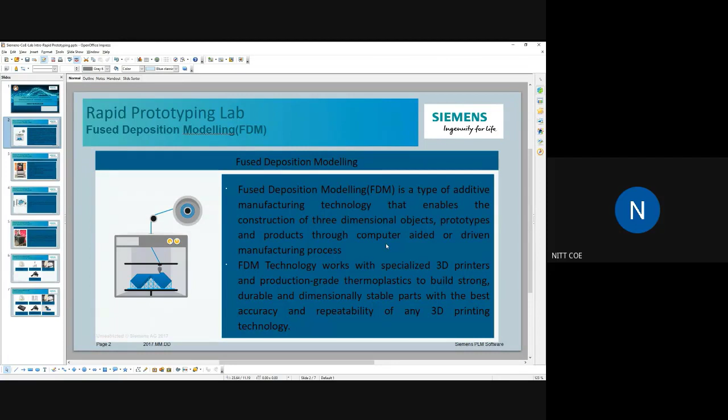And since it is actually fusing, that means melting and then hardening, the structural integrity is better than the other processes. This is the actual Stratasys F270 printer that we have here; in this image you can see the printer, and later we'll be showing a live demo of the same.

Some technical specifications: the build size is 305 by 254 by 305 mm, that means 12 by 10 by 12 inches. The minimum layer thickness is 0.127 mm, and the maximum layer thickness is 0.33 mm. In between there are two more layer thicknesses, 0.178 and 0.254. So only these four layer thicknesses are available for this particular printer.

If we go for the minimum layer thickness, the accuracy and the surface finish would be high. But if we go for a higher layer thickness, the time taken would be less, but the surface finish would not be so good, and accuracy may not be perfect. The tolerance for the printed part is plus minus 0.2 mm, which is very low as compared to other manufacturing processes.

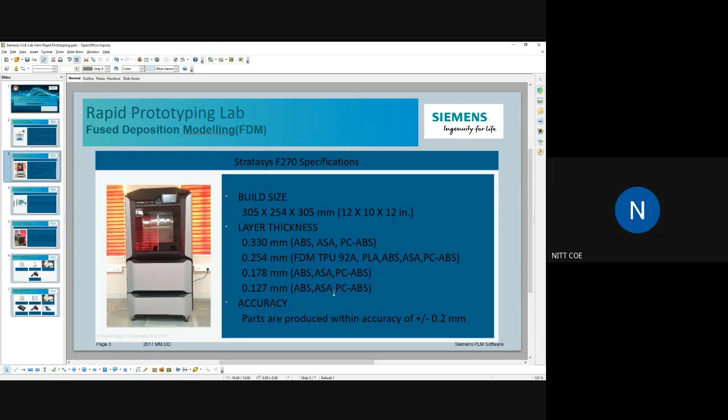We are going to use the GrabCAD Print software for integrating the 3D printer with our desktop. The advantage of using this software is you can directly feed a CAD file into it, and it would automatically convert it into an STL file. You don't need to tessellate it separately. It saves time, and you can just create the CAD model.

Once you're done with the CAD model, just feed it into the software. The software does the rest, and everything is automated. You don't need to orient it or arrange it. We will also see how to use the software to generate the parts, how to import, arrange, and scale them. Depending upon the scaling and the layer thickness, we can estimate beforehand how much time it would take.

Finally, once we are done with the printing, some support material would be there with the total printed part. So we have to remove the support material and take the build material only. That's our finished product. Sometimes we can manually remove it, but sometimes it is so intricate and so delicate that if we try to remove it manually, it may damage the actual workpiece.

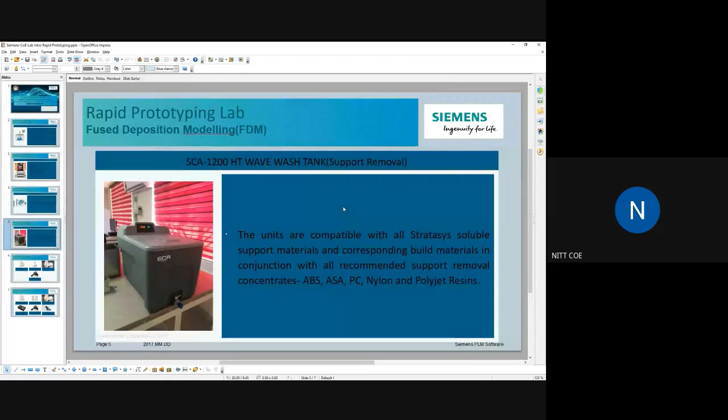So we have a wave wash tank here in our facility, and it has an alkaline solution inside it. We can dip the part inside and heat it for a particular time. The melting temperature of the support material is less than that of the build material, so when we heat it, the support material dissolves inside the solution, and the build material remains as it is. So it can remove the support material without damaging the build part. We will also see how to operate that.

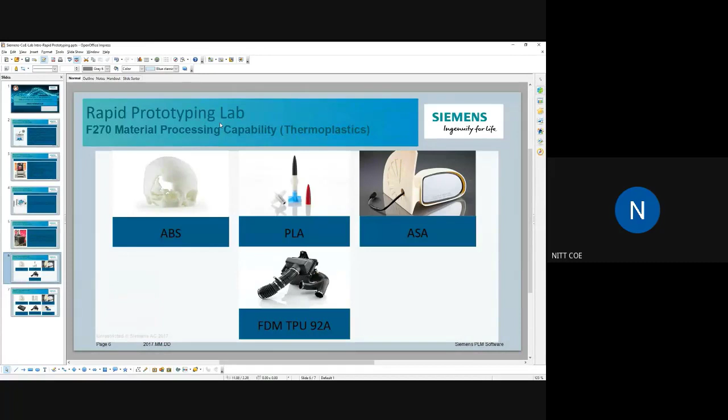And finally, we can see the different components that may be produced from this rapid prototyping. We can make biomedical parts; we can create this prototype of the skull. In injection molding, an example has been shown here. In automotive parts, parts which do not require much structural integrity may be easily produced on mass scale using this 3D printing.

And very small, intricate, fine detailing, for example in printed circuit boards, may be created using this technology. Flexible piping and various mechanical parts which only have to support the actual parts and don't require much structural integrity may also be made.

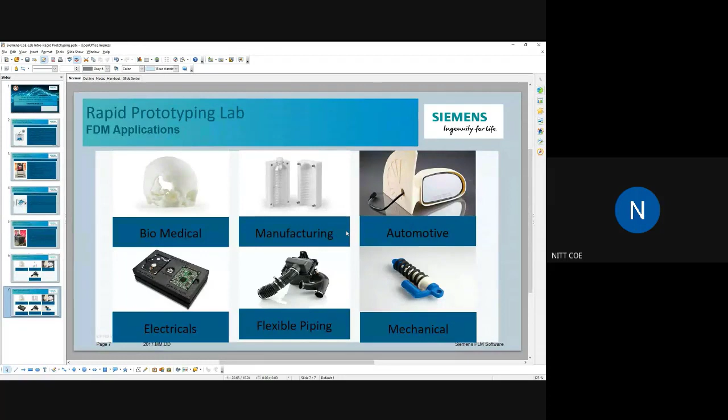Okay, so that's all for the background theory part. Now we can move on to the actual software that we have here. So this is how the GrabCAD software interface looks. As you can see, it is showing a build plate diagram, and upon it, it can show us where the final build piece should be placed.

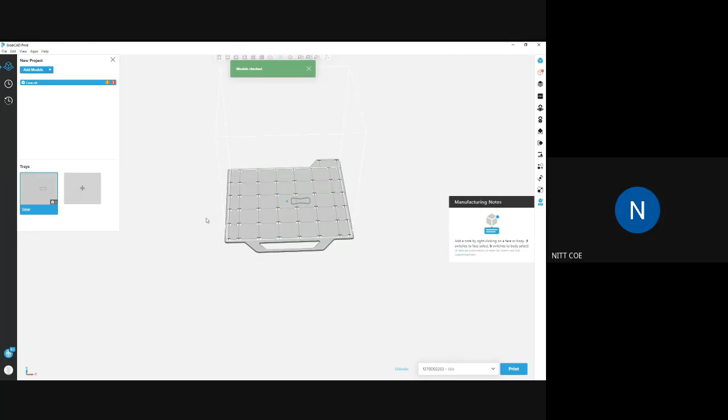Once we have opened this GrabCAD software, we can go for add models, and from our device we can upload any model. For example, I'm going to import this gear CAD model that I already have. It is saying that it has been imported. As we can see, it has imported the model, but it is very small, so it won't be of much use. So I can scale it up. But before that, you can see that it is showing some errors. The model has some errors, and it is very small.

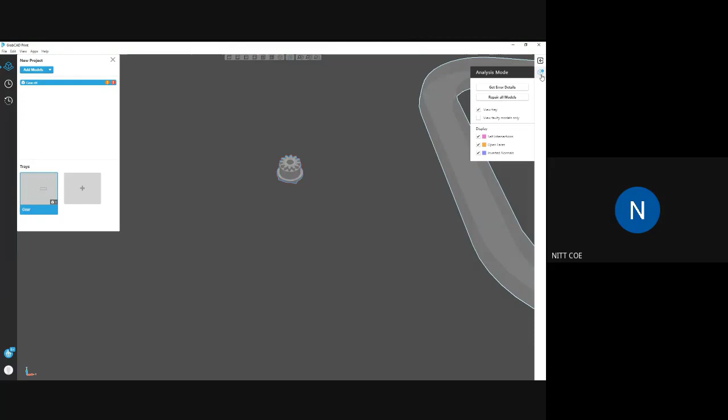It may be because of compatibility with the software in which it has been made. We don't need to worry about that; the software will automatically fix those errors. You can click here. In the analysis mode, it is showing repair all models. So we can click on repair all models, and it would successfully repair it. Now it is showing only one thing, that it is very small.

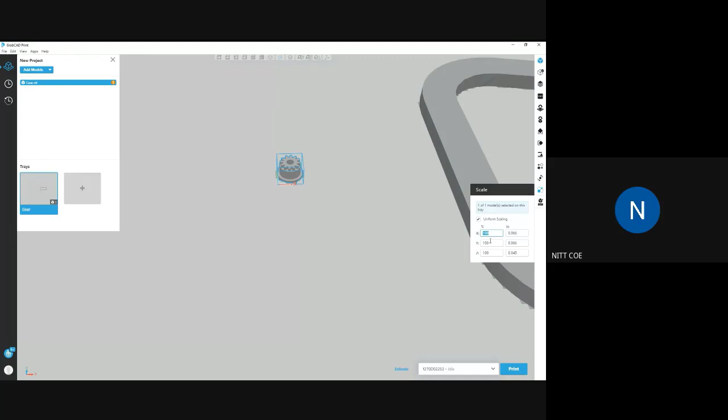So here we can see scale. We can go for scaling, and right now it is showing the full size, 100%. I have checked the uniform scaling. That means if I change x to 200%, y and z would also be changed by 200%, since it is uniform scaling. But still it is showing the model is very small. So we can try 500%. Now the error has gone, and I think this print may be formed.

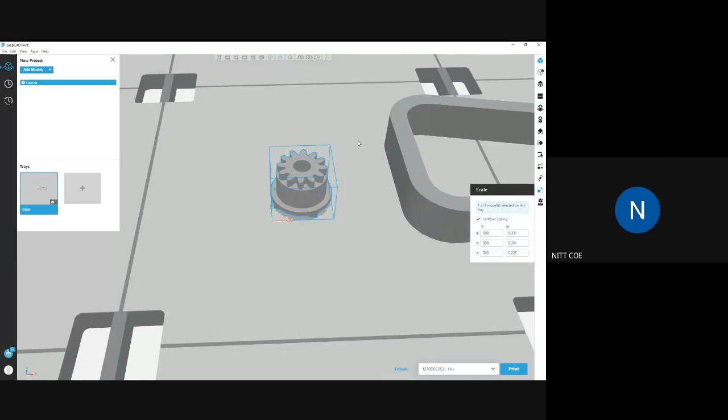Now other things are also there. For example, if I go here, it is showing the model units are in mm. We want mm only, so we will leave it as it is. Now here it is showing the tray setting. For the model material, right now in our facility we are using ABS material only, so we will leave it as it is.

Now it is asking for the slice height. The slice height means the layer thickness. As I have shown earlier, we have four different layer thicknesses: 0.005 inches, 0.007 inches, 0.01 inch, and 0.013 inch. So this is the minimum and this is the maximum.

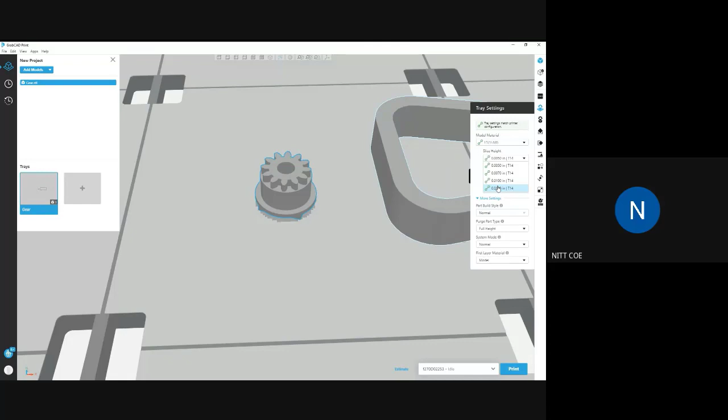If I take the minimum, the surface finish would be very good, but it would take much time. So in order to save time, and for demonstration purposes only, I will take the maximum layer thickness. The surface finish would not be so good, but it would take less time. The rest is default; we can leave it as it is. And now the model settings.

Now it is showing how the body should be. So now when it is infilling the layer, how should it fill? Here it is showing sparse. That means it is best suited for further reducing the density, when structural integrity is not a prime concern. So for demonstration purposes only, this setting is very good. So we can select this.

The second one is sparse double dense. It is a little bit more dense, but structural integrity is still low. The hexagram setting is the best balance between material use and structural integrity. The fourth one is sparse high density. It is used for high structural integrity when solid infill may cause build issues.

That means it needs to be somewhat porous, but at the same time, the structural integrity should not be compromised. And the final one is solid. It would leave no porousness, just fully fill all the parts, all the holes. So for the time being, we are going to use the sparse infill style. And the rest are default settings. We can leave them as they are because they are already optimized.

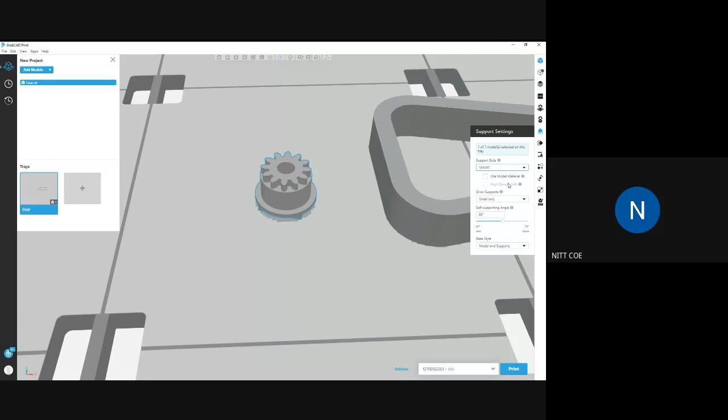Now the support material setting. Here it is saying that support style is smart. In the smart setting, it automatically chooses which type of support material is best suited for the given component. We can also choose manually, but since it can automatically detect, we will select the smart support style. And everything else again is default for smart style.

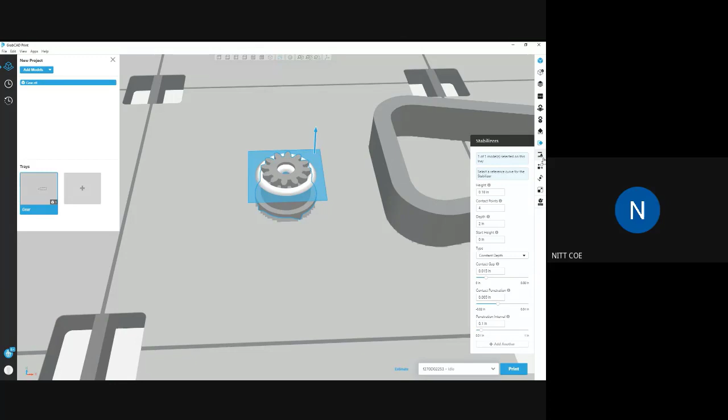And this one is stabilizer. When we are building a very big component with overhanging structures, then we need stabilizers. But right now we don't need any stabilizer because it is a very small component compared to other big components that we may build. And anchors are needed when we need to hold it tightly to the base plate. When we are building a very heavy component, we would need some anchors, but right now an anchor is not needed. So again we move forward.

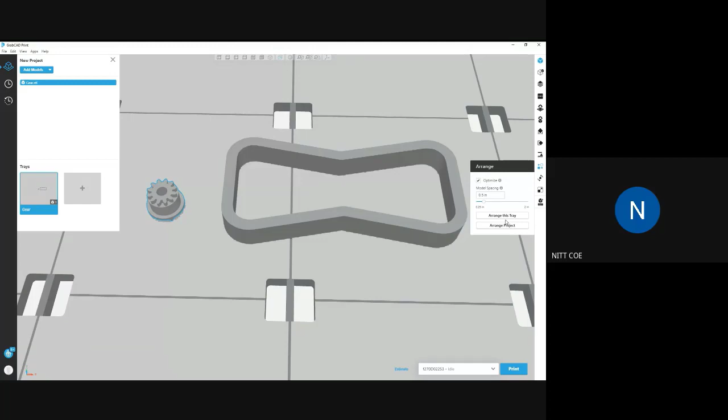Now it is showing arrange. If we are building more than one component, then we would need the arrange option, to optimize and arrange the tray. If I click on arrange this tray, it would automatically set them in the best possible location in the tray so that the nozzle has to move the minimum distance, and also the two components are safely spaced apart so that they don't get mixed during printing. It automatically detects the best possible configuration and arranges accordingly. We don't have to do anything. And the last one we have already done, scaling.

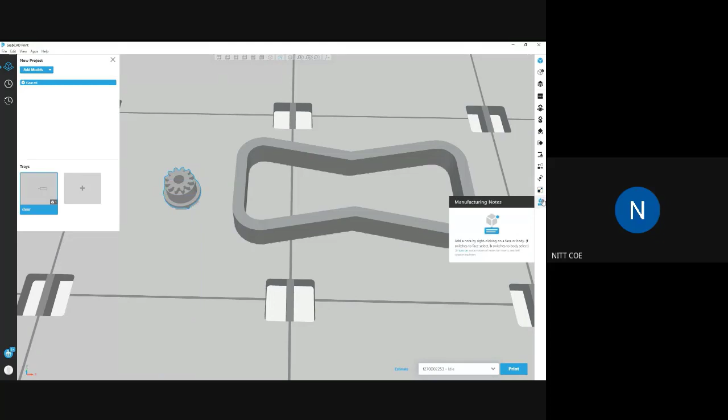Okay. So once we are done with this, we go to the printer selection. We type here the IP address of the printer and then select it. Since we are already connected, it is showing status is F270. We'll select it, close it, and here it is showing the estimate button. We click on estimate and see how much time it would take. Around 6 minutes. So we can give the print command and see how it is printing.

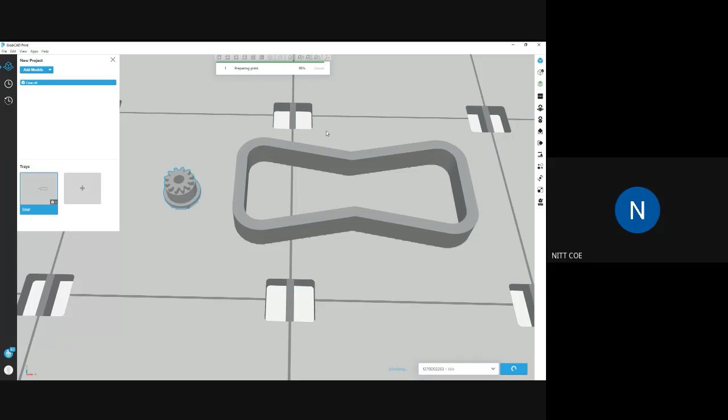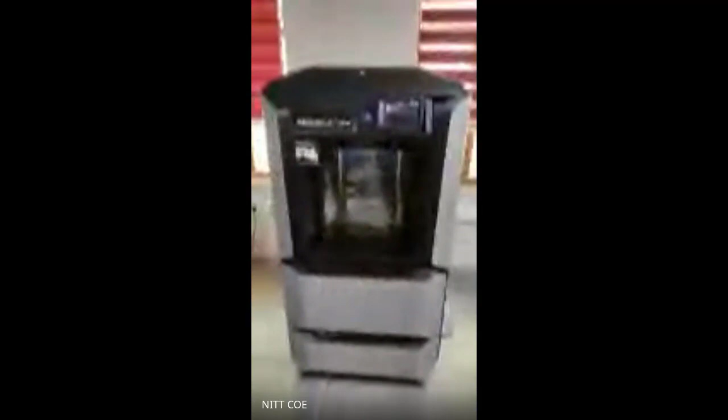Okay. So here is the complete printer, as I've shown earlier. Here we can see that in the queue it has given this gear component; it is showing in the print queue. It is showing the position in the build tray, and we can give the print command. Now we will see how it is actually printing.

So here it is showing the actual time for printing. It is showing estimated time 8 minutes. Now it has started. Now it is raising the plate to the top. As soon as the first layer is done, it would move one layer, then again

go on. As we studied in the fused deposition modeling, the plate would keep moving downwards until the required height is reached. Okay. So once it is done heating and printing, it would be completed. So total time it is showing 19 minutes.

So in the meantime, we can see the wave wash tank that we were talking about earlier. So this is the wave wash tank that is used for the post processing of the printed parts. So inside here we can see it is the alcohol solution, and in this we can keep the printed component.

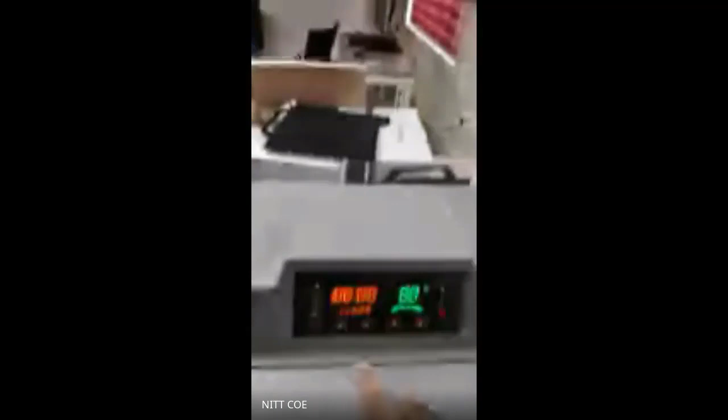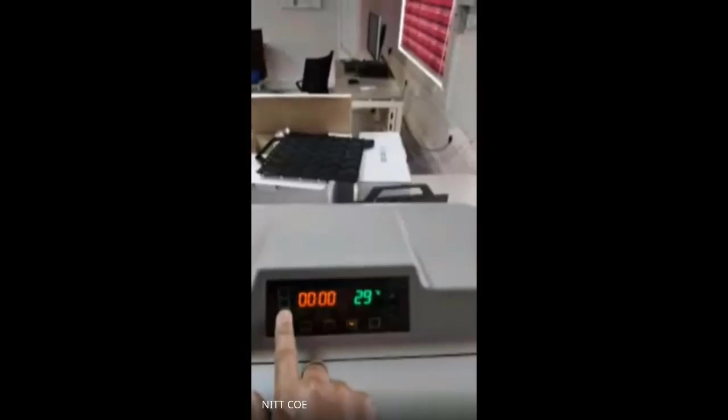And when we close it, here we can see there are the different temperature limits. So 50 degrees Celsius, 60, 70, 85, and we can also set the timing for that. So if we set the timing and set the temperature, then for that time it would heat at that temperature, and the support material would be dissolved.

So this is one of the printed components, the gear components that we have printed earlier. So this is how the final printed product would look like, and it has been cleaned in this wave wash tank only. So here we can see that heating would take 16 minutes, and after that, 6 minutes it would take for the final printing.

After that, we will take this plate out, and again, as we saw earlier, we will use this spatula to remove this component from the base plate, and then we will place this component inside this wave wash tank and clean it. And once the support material has been removed, we will get this final product.

And up till then, we would see how it is actually printing. In the meantime, if you have any doubts, you can ask, while the printing goes on. Please, anyone. So now still 11 minutes it is showing. So after 11 minutes, it would take 6 minutes to print, and then we can see how it is actually printing.

Shubham Murari, sir. Yeah. Yes, sir.

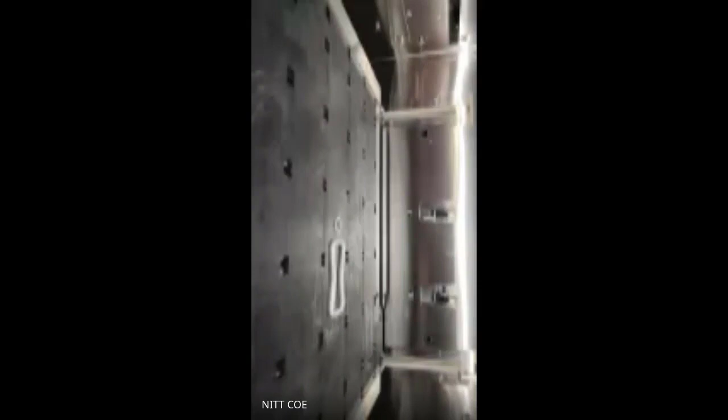So we have paused the printing process for the time being, because it will take too much time to print. So we can see that this is how it prints layer by layer. You can see on the right hand side the purge material is there, and on the left hand side the actual build is there.

So it is printed up to, I think, how many layers? Yeah, around 4 or 5 layers it has printed, and like this it would look, and it would keep on printing up to 52 layers.

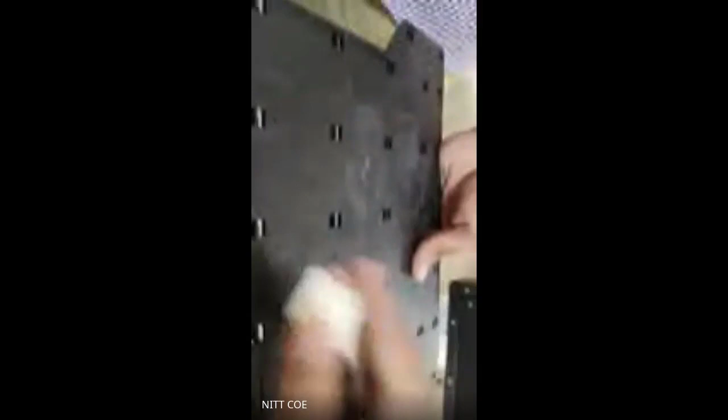And this is how the final build material would look like. For this material, it has printed up to 4 or 5 layers only. Up to, suppose, this layer only it has printed. So any questions regarding this?

Hello, sir. Hello. Yes, sir. Hello. Dr. Zahir from Hyderabad. Yes. Good morning. Good afternoon, sir.

Sir, can we print the pancreas itself? Pancreas. Yeah, organ printing is possible. We just need to have the CAD model. If we can prepare the CAD model, then we can print it in the proper size. It is possible. In fact, the biggest application of 3D printing is for biomedical.

Secondly, the question is not related to your lecture. Two months ago, I attended a lecture regarding 3D printing. That doctor told me that we can develop the teeth itself. New teeth can be developed. As we know, teeth grow only two times, and after that we have to use an artificial tooth. But he passed a message that now the technology is such that we put the material in the root, and that will be developed. So how do they stop that?